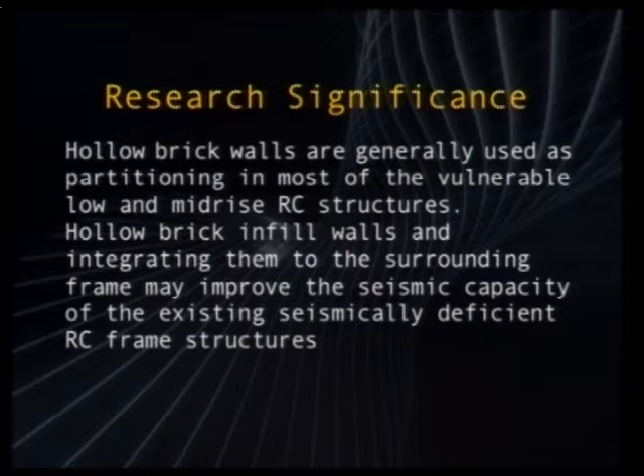Hollow brick infill walls are generally used as partitioning in most vulnerable low and mid-rise RC structures. Integrating hollow brick infill walls into the surrounding frame may improve the seismic capacity of existing, seismically deficient RC frame structures. Yes, the building I showed you is seismically deficient, and it gets earthquake damage to itself.

What we will do is integrate the infill wall into the RC structure. Integrating means packaging the infill wall inside the RC frame. How is it going to be packaged? We have some innovative products or materials that I will present in this lesson.

These elements can combine the infill wall with the surrounding RC frame. When you look at the structure, if there is a torsional deficiency and it behaves very weakly torsionally, the infill walls cannot stand in their own plane, so they work out of plane.

To prevent this failure, we must integrate these infill walls, and we can use them as fuse elements. What I mean is that when you integrate the infill wall into the RC structure, the RC elements get some damage, but the infill wall also takes damage together with it. When we compose them together, they work like a shear wall, so they behave well during the earthquake.

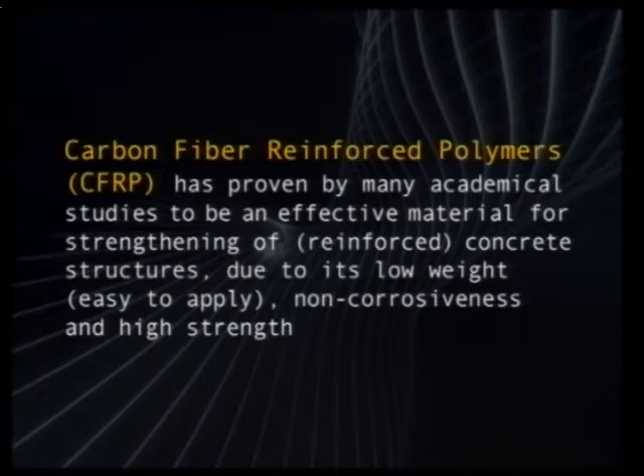This material is actually like cotton, but it has very high yield strength, much more than reinforcement. But you have to apply it with an epoxy.

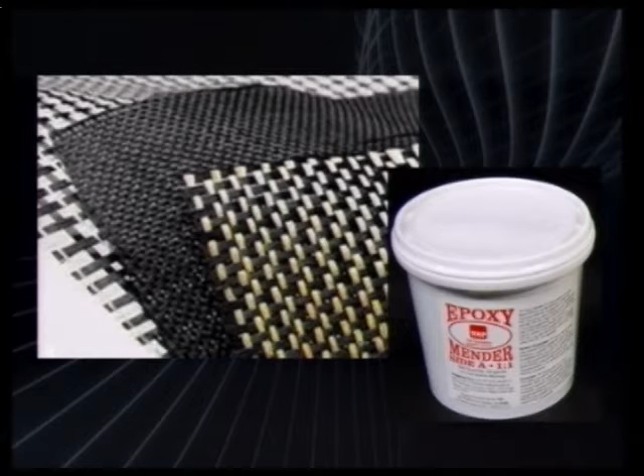You can see the CFRP, let's say it's a carbon fiber polymer. We need to apply this sheet element to the structure using the epoxy shown here. The epoxy has very high compressive strength. It's like a paint, but actually it's very easy to apply.

First of all, you clean the surface of the structure. Then you first apply the epoxy like a paint to the mortar of the walls. After that, just a second later, we cannot wait too much, because it hardens within a second, so you have to be very quick when applying this CFRP.

Directly you apply the CFRP, and last you apply one more epoxy layer, and it's finished. We will understand how it's going to be applied to structures in our next lectures.

The questions are: define the vulnerable structure. What is epoxy? What is CFRP?

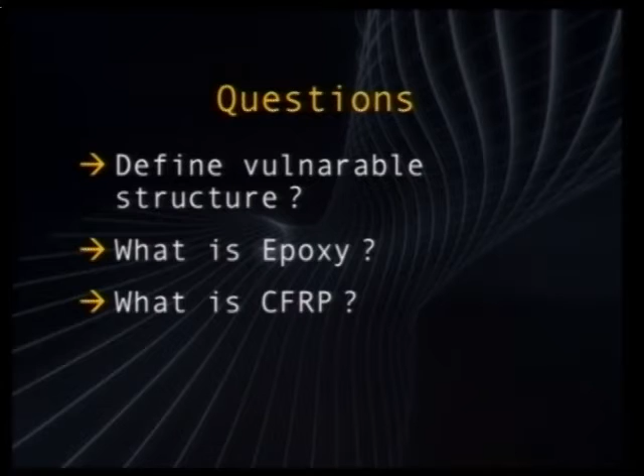The CFRP makes the structure behave like a shear wall, increasing its stiffness and strength, and besides these two important properties, also increasing the damping of the structure. When the damping of the structure increases, the energy dissipation capacity during the earthquake increases too much.

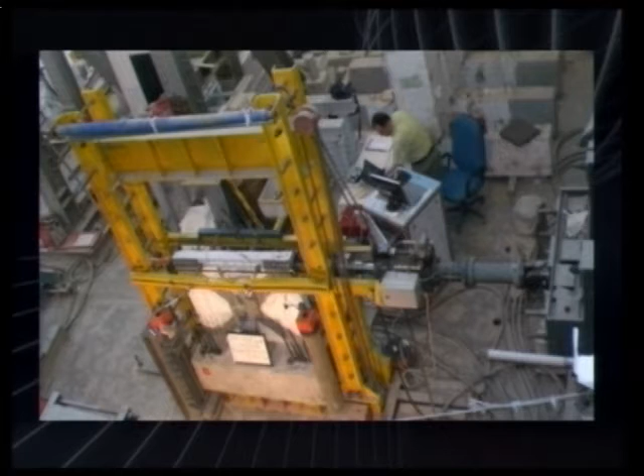What we have done is perform several experiments during this study. This picture is a general photo taken from our laboratory in Istanbul Technical University. A series of pseudodynamic tests and quasi-static tests were performed in order to understand the general behavior of the infill walls when they are integrated to the reinforced concrete structure.

We understand that in this lecture, it will be better to understand what the academicians have proven up to now, and what we can do after this point.

We know that current studies up to now have been performed through experimental and theoretical studies. They mention and highlight mostly that infill walls, when integrated to the structure, increase the strength and stiffness of the structure.

But what we have to do is look at this issue from another view: the energy dissipation capacity of a structure.

What we want to do is understand the damping concept, because there are 3 important properties that increase the earthquake performance of the structure: stiffness, strength, and damping.

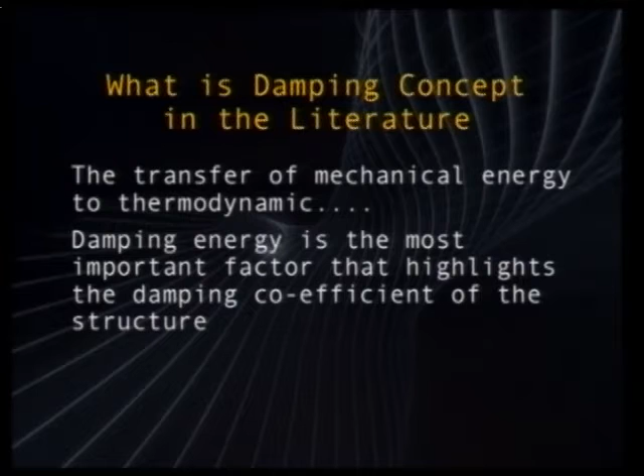There are 2 main methods to identify the damping coefficient of the structure or structural components. The first one is the logarithmic decrement method. The second one is the energy loss method.

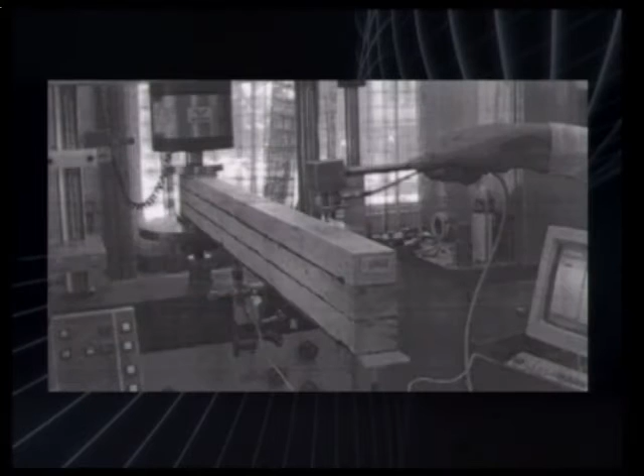The logarithmic decrement method requires a hammer test, as we see in this picture. Here we can see a small beam, which may be made of reinforced concrete, steel, or wood. It's not a problem—the methodology is the same for all structures or structural components.

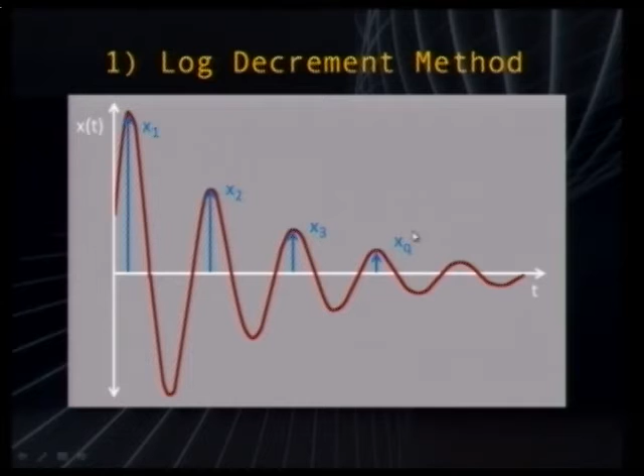You can determine the damping properties of the structures or structural components. But I want to emphasize that the damping coefficient determined from this graphic is just the inherent damping. The inherent damping means the damping of the structure in the very elastic part of the motion.

This means there is no damage in the structure. If there is no damage, there is some amount of damping, but if there is damage, the damping property increases. This method is based on the elastic method.

The other one is the energy loss method, commonly called the Jacobsen method. It was first identified in the 1960s or 70s. The method requires that you apply a displacement-based cyclic load to a structure, a beam or a column.

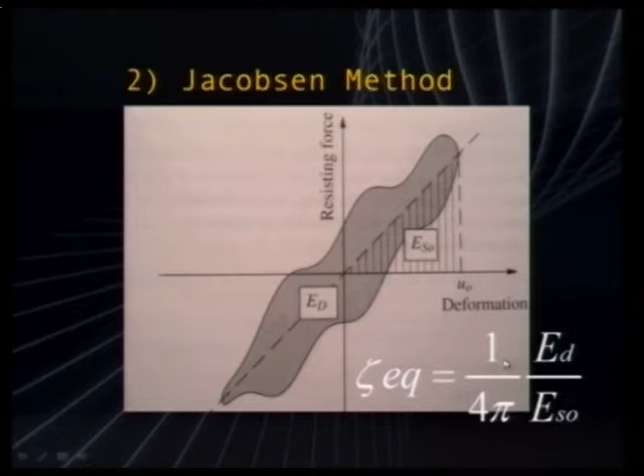You receive this graphic, where the longitudinal axis is the resisting force versus deformation. This is one loop of hysteresis, force versus displacement. You calculate the area of the whole loop, which we call ED. We also need to calculate this triangle area, let's call it E sub S0. Then the equivalent damping is determined using this formula.

The main difference between the logarithmic decrement method and the Jacobsen method is that the Jacobsen method is based on nonlinear properties. The structure can have nonlinear damage, and we can understand the damping property after the yielding point. In the previous method, the logarithmic method, there is no damage - it's only in the elastic part.

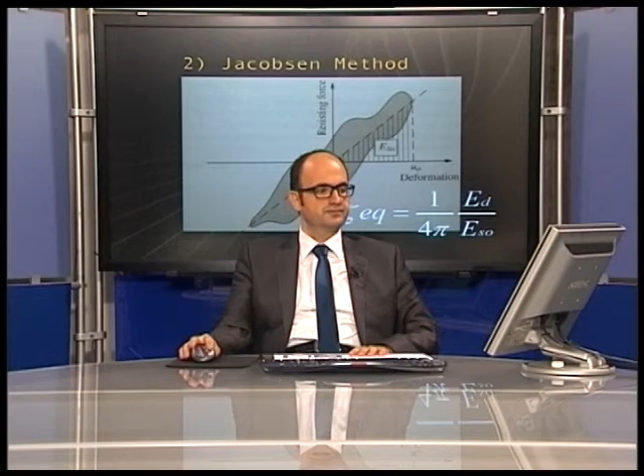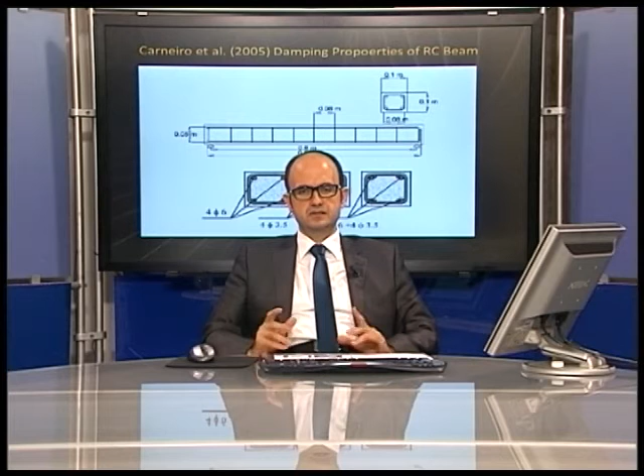Let's look at past studies to identify and verify our experimental findings, and to understand the experimental or analytical findings of previous studies.

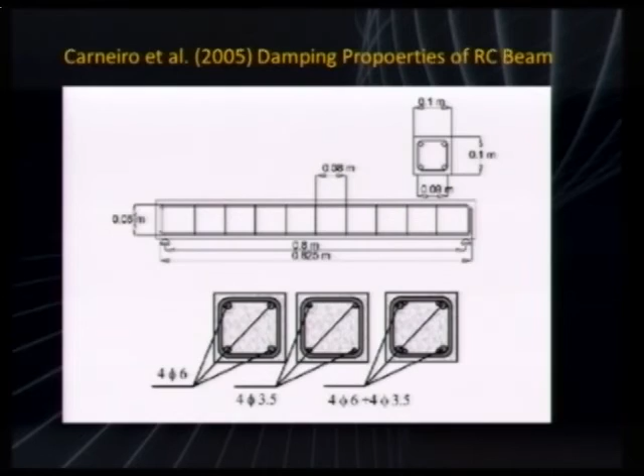Carneiro performed a study on a simple beam with different reinforcement configurations. The reinforcement configurations increase by number and by diameter, and they performed cyclic tests on this reinforced concrete beam. They determined the displacement in time as a sinusoidal type displacement.

This can be applied using a pseudo dynamic testing method, which I will also present in our lecture - the difference between the quasi-static test and the pseudo dynamic test. The main important point is that the structural component has displacement demands in both plus and minus directions, so we can understand the cyclic behavior of the structure.

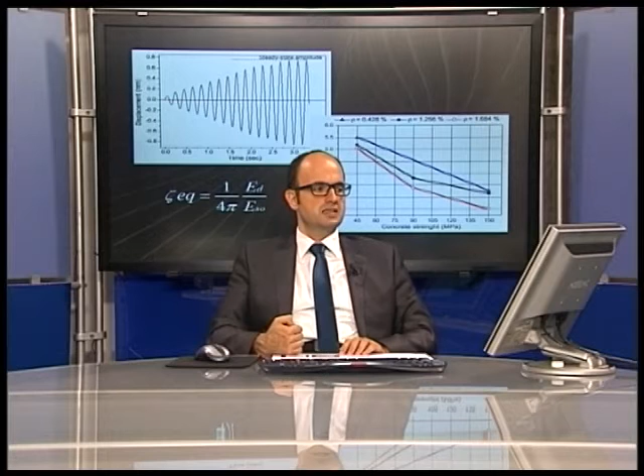When we derive the cyclic behavior, force versus displacement, it is very easy to apply this equation to the experiments. This was the first experimental study we found in the literature showing that when there is an increase in concrete strength, the damping coefficient decreases, and when the reinforcement density increases, there is a high decrease in the damping ratio of reinforced concrete sections.

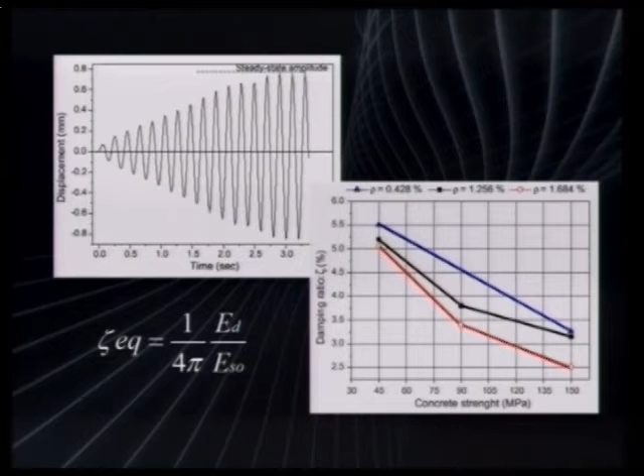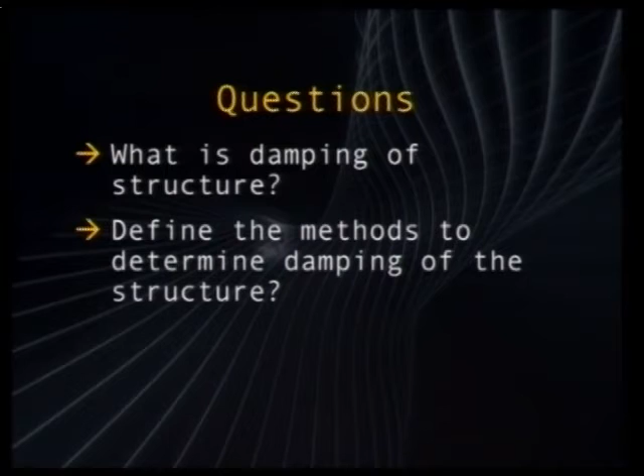This study helped us find out how to quantify the damping properties of the structure. Based on this, you should be able to answer these questions: What is the damping of the structure? Define the two methods for determining damping of the structure. What is the main role of infill walls?

The last part of our presentation is to take a better look at the literature review. In our country, this study was performed in 1998 by Professor Yüksel. His PhD study is mainly based on integration of partitioning walls into the RC structure.

They considered integrating the infill walls to the RC frame by casting together with the infill walls. You can imagine there is casting at the edge of the column or beam, but inside there is no casting - you put the concrete inside in situ, and the concrete goes inside into the infill walls. When the concrete goes inside the infill walls, they act together.

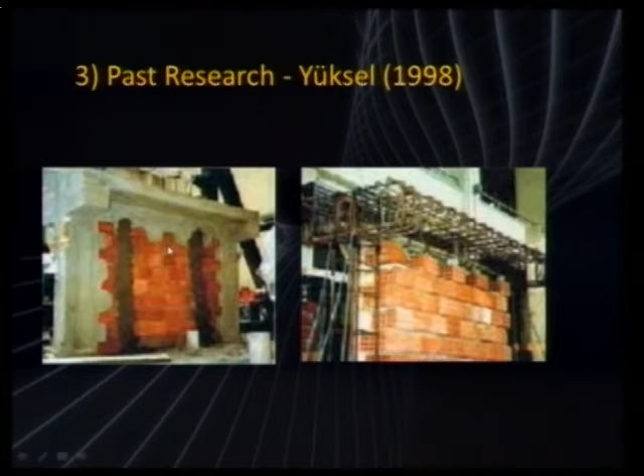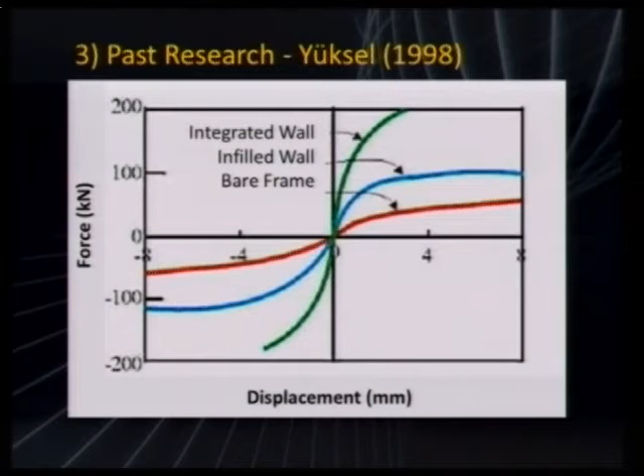With the infill wall, there are no torsional effects - the only motion is in its own plane, so there is no sudden decrease in forces. There is good ductility of the structure when using an infill wall. But when you change the construction style by integrating the infill wall, making the casting together so the concrete goes inside the infill brick elements, the strength increases very highly compared to the bare frame, and the stiffness of the structure also increases very highly.

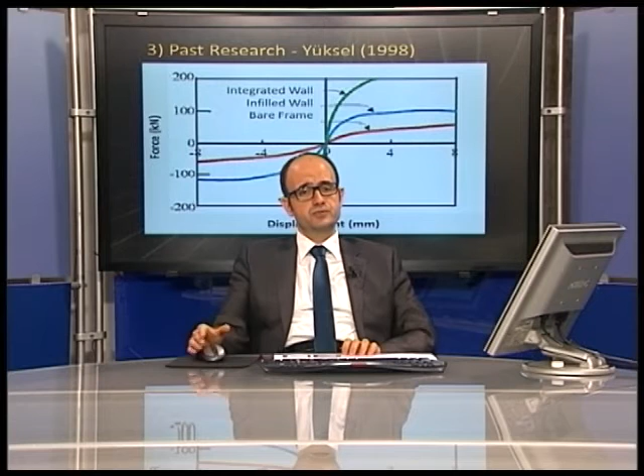This study is a milestone for our researchers, showing that when you successfully integrate infill walls into the RC structure, the earthquake performance of the RC structure may increase tremendously.

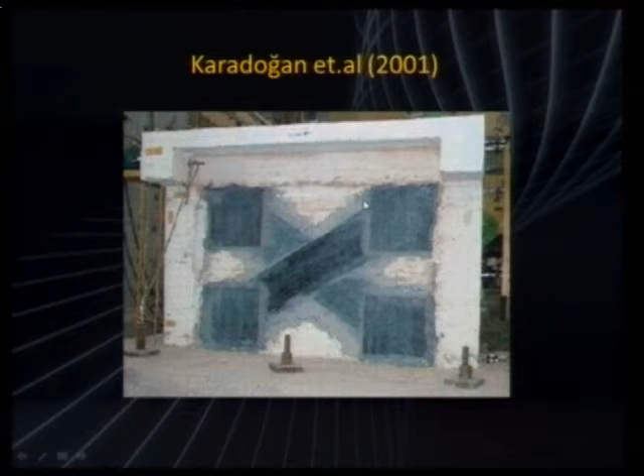Three years after that study, the CFRP application came out. There is no integration here - it's based only on applying CFRP to the structure. This is a half-scale, maybe three-quarter scale structure. The method integrates the infill wall by applying CFRP sheets, but this one is applied in diagonal bracing, like an X-type bracing, with concentrated loads between the joints of the structure and the foundation, to integrate the infill wall and make the CFRP work successfully together with the infill wall. You need to put these extra square CFRP sheets on the frame.

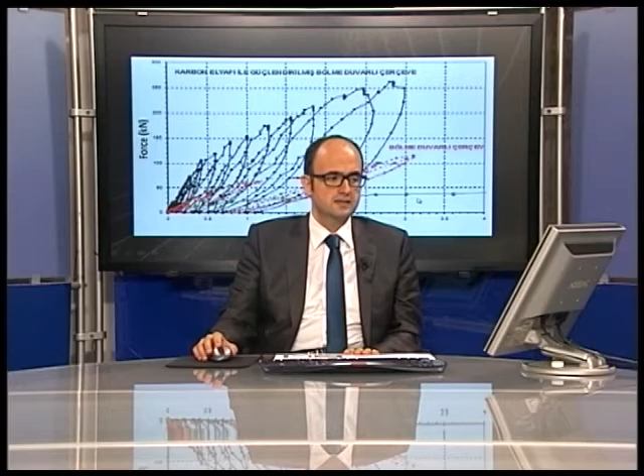When we look at the backbone of the cyclic experiments here, the black one is the one with CFRP application. The red one has no CFRP application, and the green one is actually the bare frame, with no infill inside the RC frame. We can see that the strength and stiffness of the structure increases tremendously when you apply the CFRP and when you are successful enough to integrate the infill walls to the RC structure.

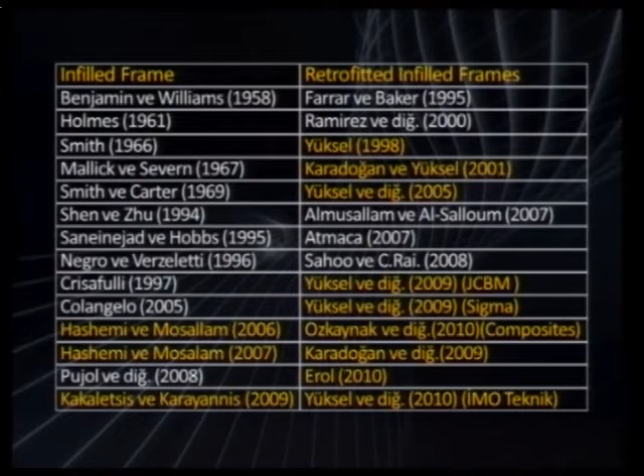After these two milestone studies, there are too many studies. The most important for us is the one performed by Mosallam in 2006 and 2007, because the energy dissipation capacity and damping properties of the structure that I try to explain in this lecture are mainly highlighted in these two milestone studies.

Let's look at the study of Negro. The displacement demands were received, and the stiffness and strength of the structure were highly understood after the application of experimental studies. This study was performed in Italy, based on pseudodynamic tests. It's a 1/1 scaled infill RC frame performed in the laboratory of ELSA.

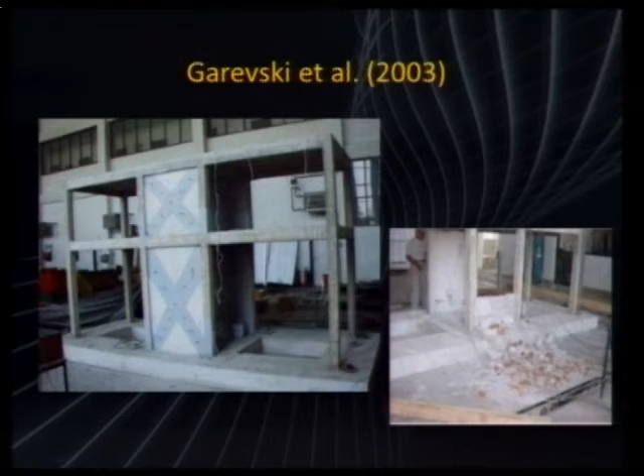Another study is from Garevski, performed in Macedonia. It's a real shake table test, which could help to understand the effect of CFRP. As you see, there is out-of-plane failure of the infill wall, but in the other photo, the infill walls are successful enough to stand in their own plane during the earthquake.

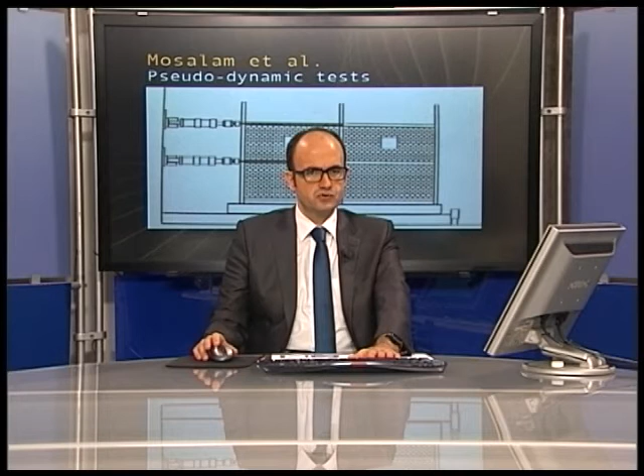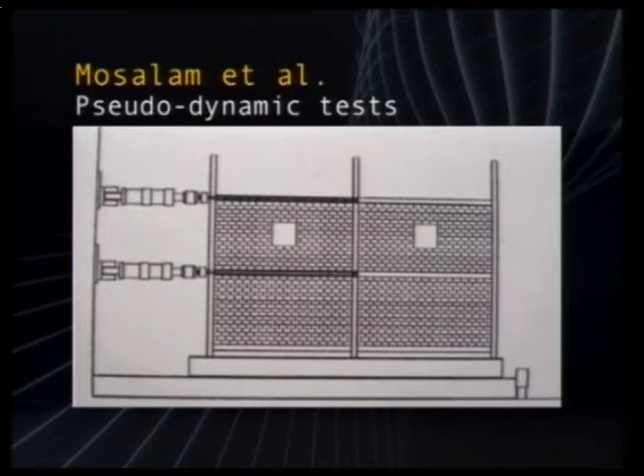The other study is the pseudodynamic study of Mosalam. There is an infill wall inside a steel frame. These are steel frames, so it's not directly representing our case, but it gives us an idea that may be important for us to explain our experimental studies.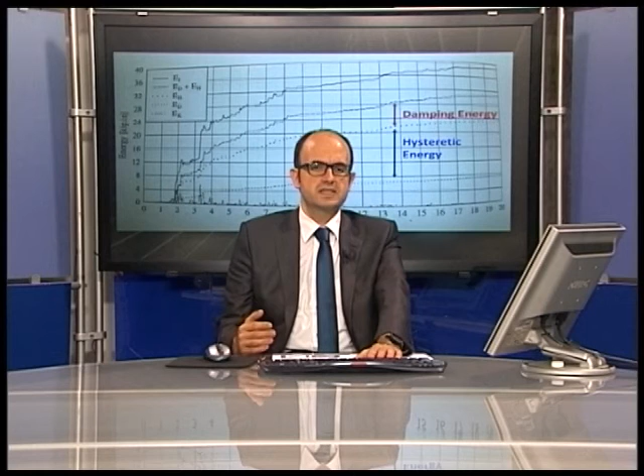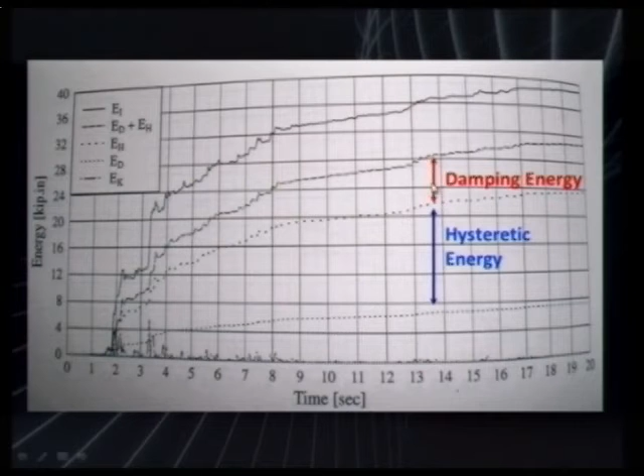The most important point of this study is to quantify the energy terms. Energy discretization was performed because the study used pseudodynamic tests, which require an input earthquake record. This earthquake record supplies us with the velocity, displacement, and acceleration of the structure, allowing us to pass through to the energy terms of the structure. The hysteretic energy and the damping energy can be quantified by this method.

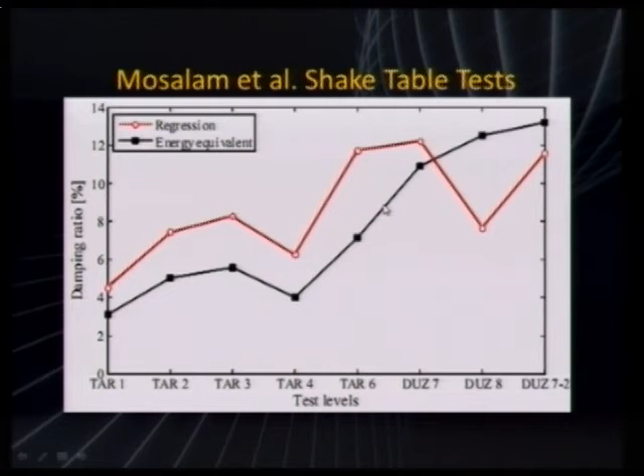The shake table tests performed by Mosalam were used to understand the damping coefficients of the structure. The damping coefficients increased at increasing levels of experiments, which resulted in nonlinear behavior and high damages on the structure. So when the damage increased, the damping increased proportionally. Actually, there is no direct linear proportion, but when you make a general comparison, there's an increase in the damping property of the structure.

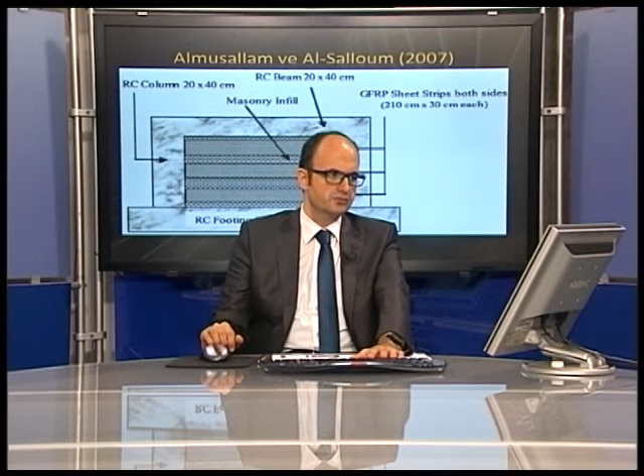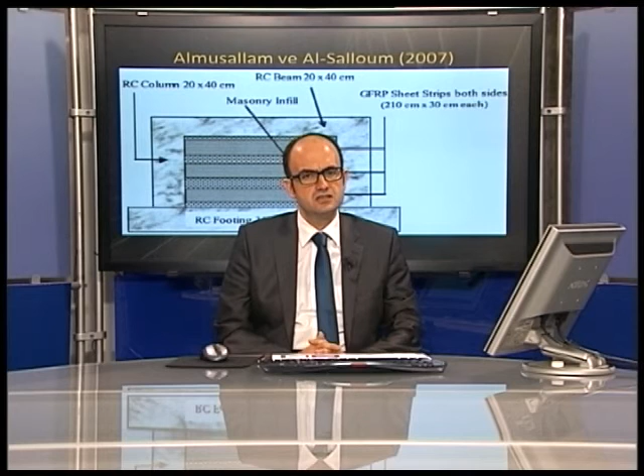Other studies applied CFRP in different ways, in the longitudinal direction, because when the aspect ratio of the infill wall—the ratio between length and height—changes, you need to apply the CFRP differently. When this ratio is much greater than 1, you apply the CFRP in the longitudinal direction. When the aspect ratio comes around 1.0, you need to change the application of CFRP in a different way.

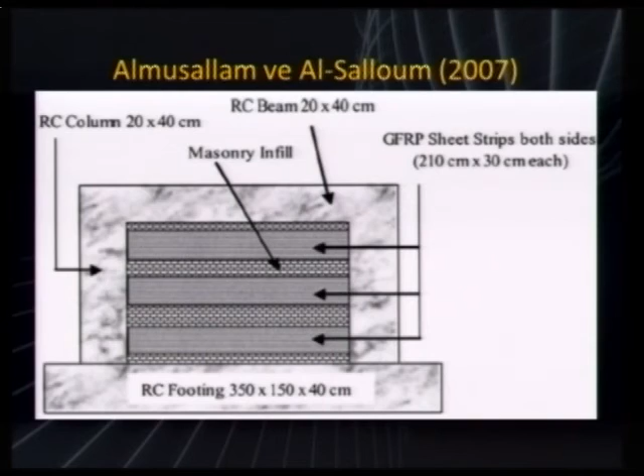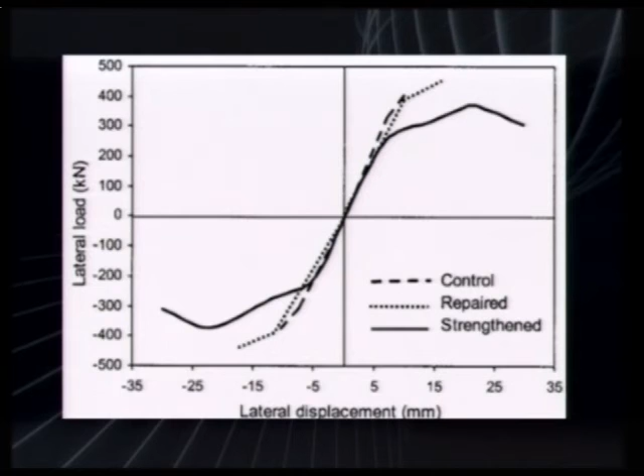This application proves the effect of the CFRP material. Actually, this study is based on GFRP, not carbon-based—it was glass fiber. When there is a comparison here of lateral load versus lateral displacement, the increase of strength and stiffness can be highly seen.

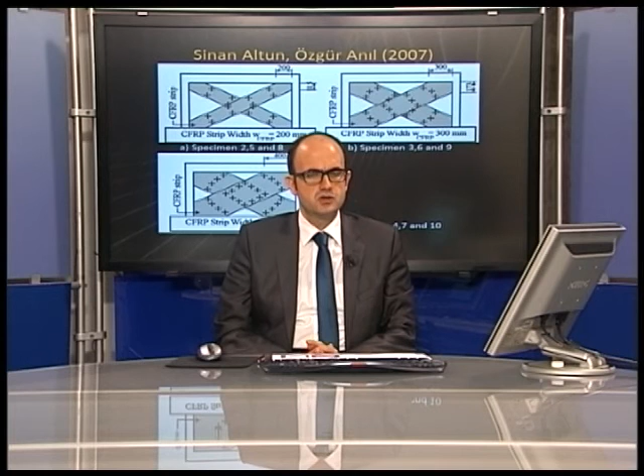The other study is performed by Altun using different thicknesses of the CFRP band. When you want to make analytical solutions for infill walls, you can model them like diagonal struts. Accordingly, when you apply the CFRP, you can change the thickness of the diagonal braces. If you want to increase the strength of the diagonal braces, you can increase the width of the CFRP, which directly increases the general behavior of the structure. This is the main idea to understand the thickness and strength of the diagonal braces.

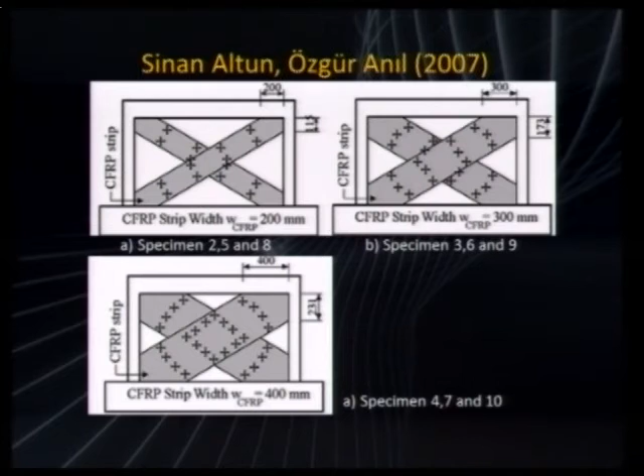In this case, when the width of the CFRP strips increases, the general behavior of the structure increases in stiffness and strength. They were performed in three different widths: 200 millimeters, 300 millimeters, and 400 millimeters.

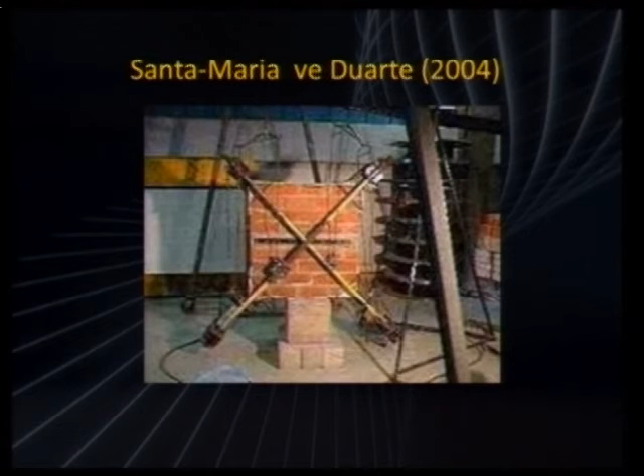For the mock-up tests performed in Santa Maria, they performed cyclic tests, which were firstly performed in compression and tension.

When you first apply compression, you push the specimen to a target point, and when you get it to the tension position, you receive a hysteresis.

I mean a regular force-displacement relation, which helps us understand the damping coefficient of the structure or structural components.

What I mean is that the application of the CFRP material is very important. It changes according to the type of the infill wall and the dimensions of the infill wall.

So to understand the effect of the CFRP material, you need to understand if it is placed in a longitudinal way, how it behaves, and when you place the CFRP material only in one direction or two directions.

Like X type in diagonal type, and when you apply this in two phases, not only one phase.

So in this study, they performed first monotonic tests, and in this part they performed first of all compression. When you put the loading in this way...

This strut tries to work as a tension strut. So the tension and compression struts change according to the directions of the infill wall.

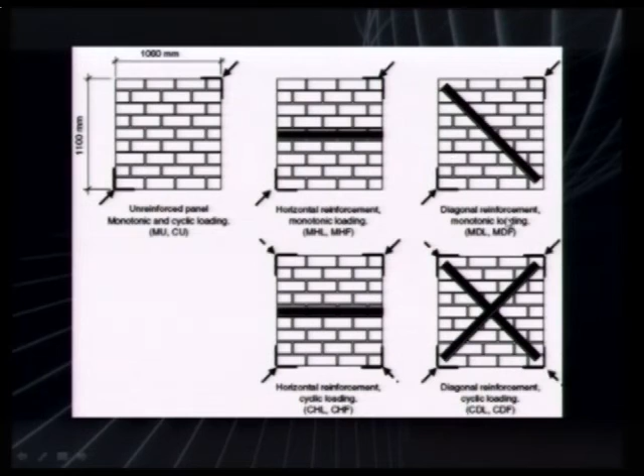The main outcome of the study is to understand the equivalent damping by applying the Jacobsen method, not the logarithmic decrement method, but the Jacobsen method.

What the Jacobsen method tells us is the ratio of the energy dissipation in the whole cycle, in one cycle, to the energy dissipation in the first triangle area.

When we divide these two terms together and calculate this, we can determine an equivalent damping.

Equivalent damping shows us the general damping, inherent damping plus the damping that is derived from the damages of the structure or structural component.

When there is damage, cracking, spalling, or crushing of the cover concrete mortar, there is high damage.

This damage gives the infill walls extra friction, extra damping. As I said earlier in the lesson, damping is energy that acts like a thermodynamic process.

And when there is friction, this friction is the main cause, the main starting point of the damping.

When the damage increases, the damping coefficient also increases in a similar way. In this study, when there is an increase in the load bearing capacity of the specimens...

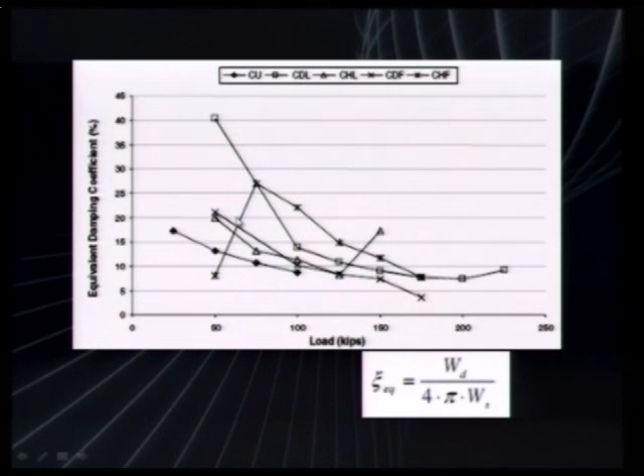This graphic is very important for us to understand that the damage is actually the source of damping.

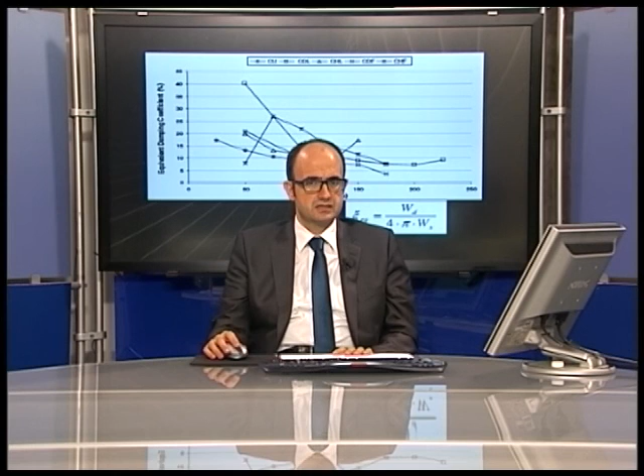When the damage increases, the damping coefficient and damping properties of the infill walls increase. This is the rationale of the study, and this is the most important starting point of our study.

In this lecture, we covered some important lessons about damping and energy dissipation capacity.

In our next lectures, we will present the damping properties of the infill walls and the CFRP-based retrofitting, and how they affect the general energy dissipation capacity of the structure.

Now, after all this lecture, I think it will be easy for you to answer these questions: What is the difference between shake table tests and pseudo-dynamic tests?

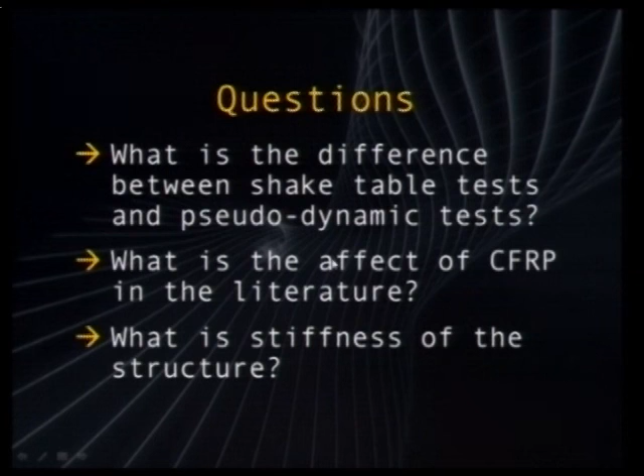What is the effect of CFRP in the literature? What is the stiffness of the structure?